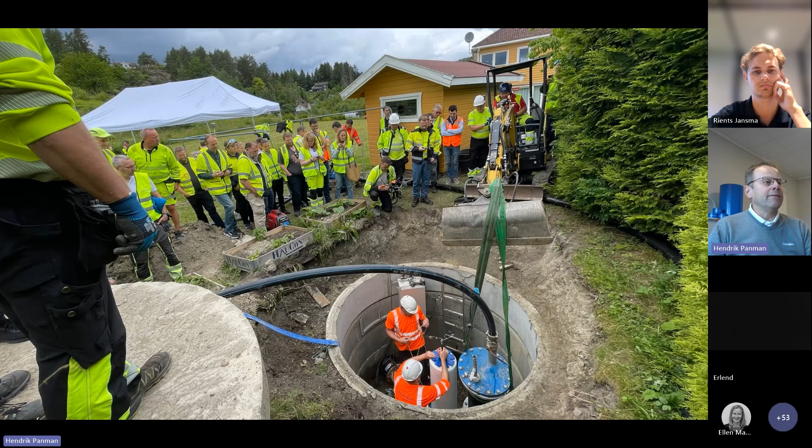Vi tok bussen til lanseringspunktet for selve lanseringen av piggen. Så kom vi frem til lanseringskummen og fikk se hvordan piggen ser ut i virkeligheten. Vi fikk oppleve at den ble ført inn i ledningsnettet. Da var det mulighet å følge piggen langs traseen, og man fikk opplæring i hvordan man gjør trekkingen av selve piggen.

Da vi kom tilbake til skolen, og piggen var på vei til mottakskummen, hadde vi en presentasjon av Rolf fra Brabant Water. Det er egentlig et stort vannverk i Nederland som har brukt Acquarius-instrumentet på 16 inspeksjoner over en lengde på 35 kilometer, så han delte sine erfaringer.

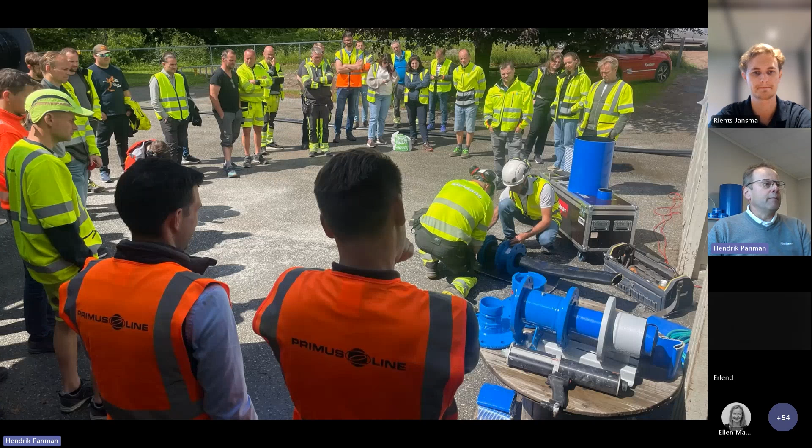Da han var ferdig med presentasjonen, var vi på stedet når piggen kom ut igjen og til overflaten. Så hadde vi en liten demo ute på forskjellige fornyelsesmetoder. Vi hadde en kombikryss fra AVK som var tilrettelagt for å ta piggen inn og ut av ledningsnettet, og en demo i forbindelse med koblinger til en primusline. Så var det litt moro med testing på slitestyrken på primusline overledd.

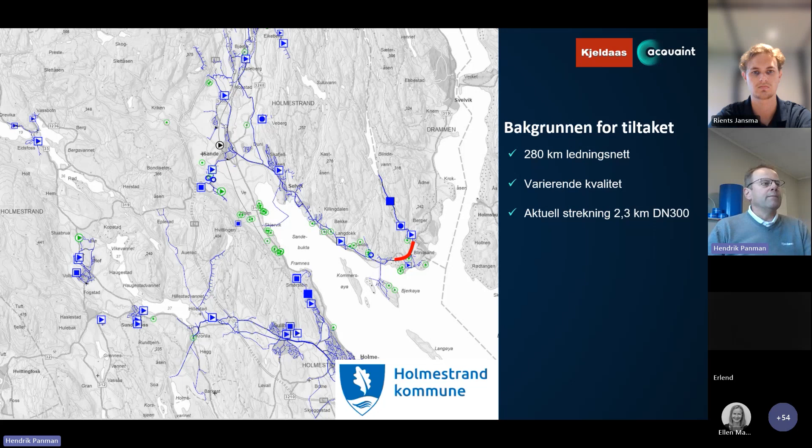Holmestrand kommune har ca. 280 kilometer med ledningsnett, med noe varierende kvalitet. De har opplevd at når de utbedrer en vannlekkasje og graver seg ned, viser det seg at røret med lekkasjen er i veldig dårlig forfatning, mens røret rett ved siden av er i veldig god forfatning. Det er egentlig hovedgrunnen til at man syntes det var interessant å kartlegge de 2,3 kilometerne med DN300-ledningen som er vist på den røde streken på kartet her.

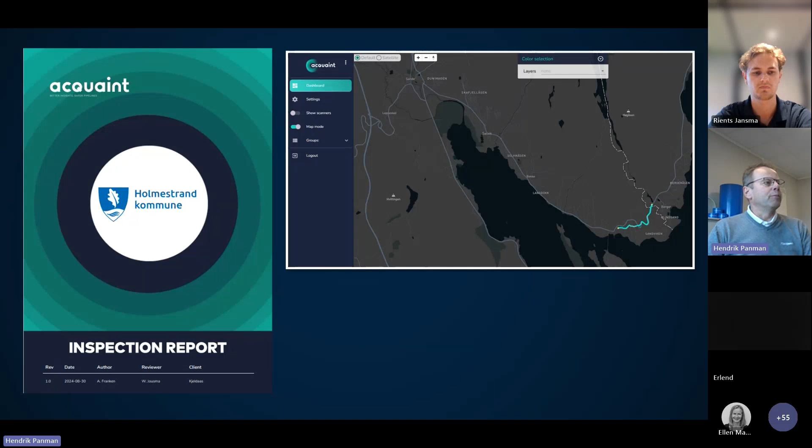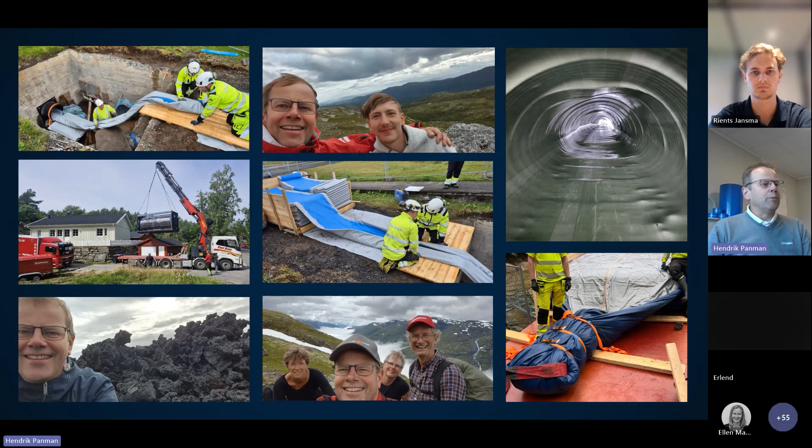Etter at vi tok ut piggen 12. juni i år, og frem til rapporten som foreligger nå, har det skjedd ganske mye som jeg har lyst til å fortelle litt om. Vi har hatt en sommerferie. Vi har installert noen strømper, både i innland og utland. Jeg har vært på Island og gjort noen spenstige installasjoner på Sandnes.

På den aktuelle temadagen viste jeg frem et ultralydbilde av barnebarnet mitt, eller vårt, som i mellomtiden har blitt født. Dette er kanskje litt koblet til hva vi skal snakke om i dag, at man ønsker å vite hvordan det usynlige ser ut, og om det stemmer overens med virkeligheten. Her må jeg si at ultralyden av den vesle gutten stemmer ganske bra overens med virkeligheten. Det er samme type ultralyd som vi nå bruker til å skanne vannledninger eller trykkledninger.

Alle instrumentene er montert på en pigg, og ultrasound-instrumentet er plassert på baksiden av piggen, på det grønne området her. Ultrasound er egentlig ultralyd, en lydbølge som på en måte reflekterer til rørveggen, og så slår den gjennom materialet, og får en refleksjon også på baksiden av rørveggen. Dette blir analysert for hvordan det fungerer - det kan ikke jeg forklare i detalj, men det er lydbølgene som på en måte gir kartleggingen.

Så har vi et instrument som heter Inertial Measuring Unit, IMU. Det er egentlig en enhet som til enhver tid vet hvor piggen befinner seg, hva som er opp, hva som er ned, hva som er høyre og hva som er venstre, som sørger for at man vet eksakt posisjon hvor piggen befinner seg.

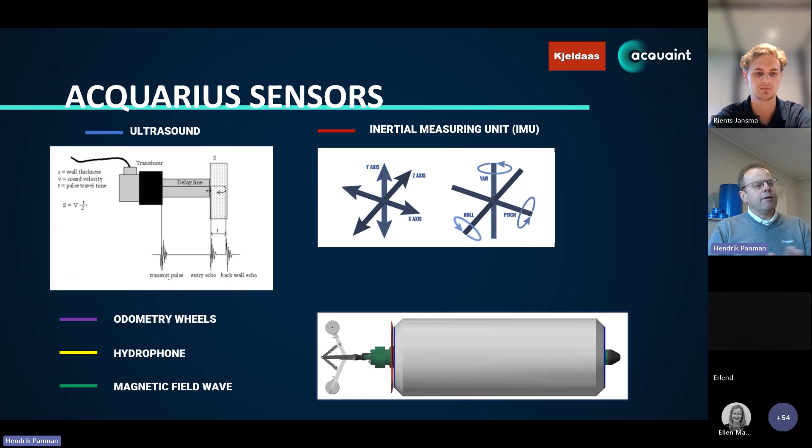I tillegg har man på baksiden det som kalles odometry wheels, hjulene på baksiden, som rapporterer avstanden. Kombinasjonen av IMU og hjulene, pluss innmålingene som ble tatt med GPS, gir en eksakt lokasjon og et eksakt klokkeslett for hvor en eventuell skade har oppstått i ledningsstrekningen. Hydrofonen er egentlig en lydlogger som sitter foran på piggen og registrerer lekkasjer.

Og så er det en magnettråd inni piggen, som blir brukt når man skal skanne betongledninger. Den hadde vi ikke med denne gangen, siden dette var en støpejernsledning. Men når man er ute etter å oppdage brudd i armering i betongledninger, brukes en pigg som har en jerntråd integrert inni piggen.

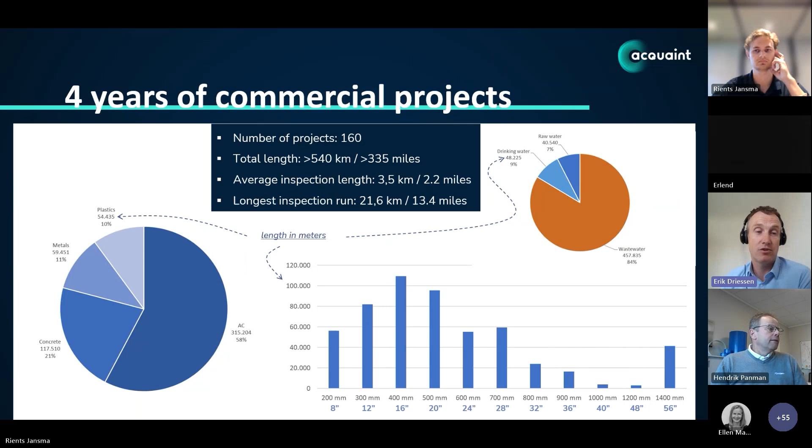We also have a sales team, and Rients is part of that sales team. Rients started with our company a few months ago, and he'll present the first results with you. Later on, I'll come back and present an online dashboard with you.

This is the last slide for me. Looking back at the project Hendrik introduced, it was a ductile iron cement-lined pipeline, or at least, little spoiler, that's what we expected—DN 300 and a little more than 2 kilometers. Rients will go through the results.

Over to you, Rients. Yes, thank you. Can you hear me clearly? Yes. Okay, very well.

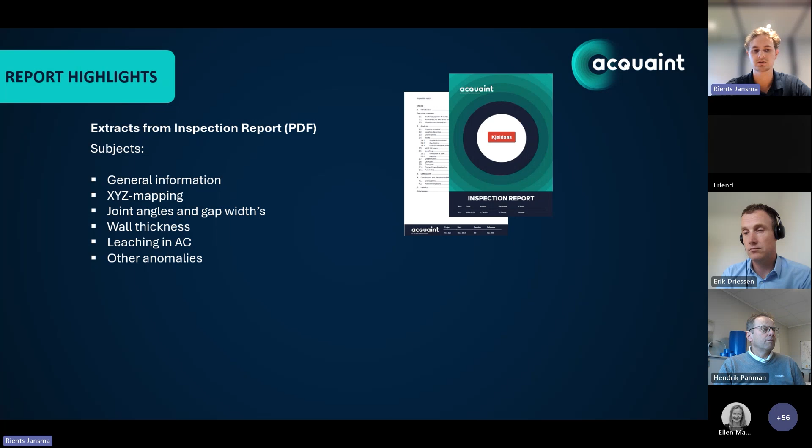I'm going to tell you about the highlights of the report we've sent to the Holmestrand kommune, covering some general information, the XYZ mapping, joint angles and gap widths, the wall thickness, the leaching in the asbestos cement, and other anomalies. After that, Erik will show a live demonstration of the online dashboard.

Starting with some general information. On the right side, you can see the map we've sent—it's a screenshot from the report. At the top is the launching site, a small section of 20 meters of DN 250. Over to the downside at the receiving point, it's DN 300 for the remaining tracé.

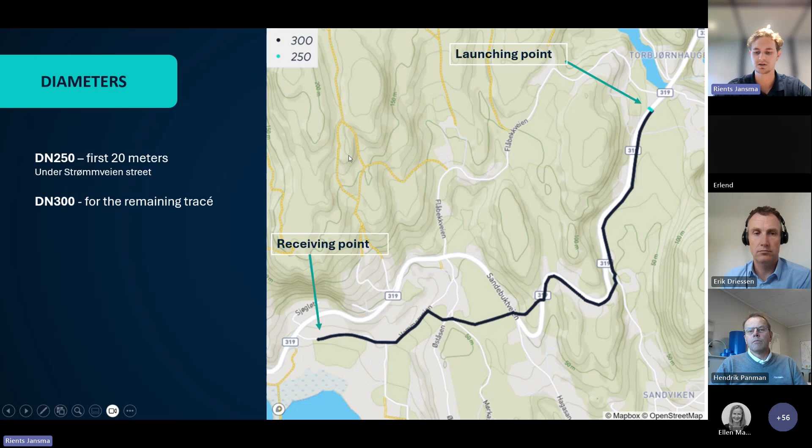So the first 20 meters is ductile iron without a cement liner. Then, as Erik spoiled a little bit, the following 700 meters is asbestos cement. Furthermore, there was cement-lined ductile iron up to the receiving point, and some cast iron spots, mainly in the bends. The presence of the asbestos cement was unknown beforehand, which is a big result to get to know.

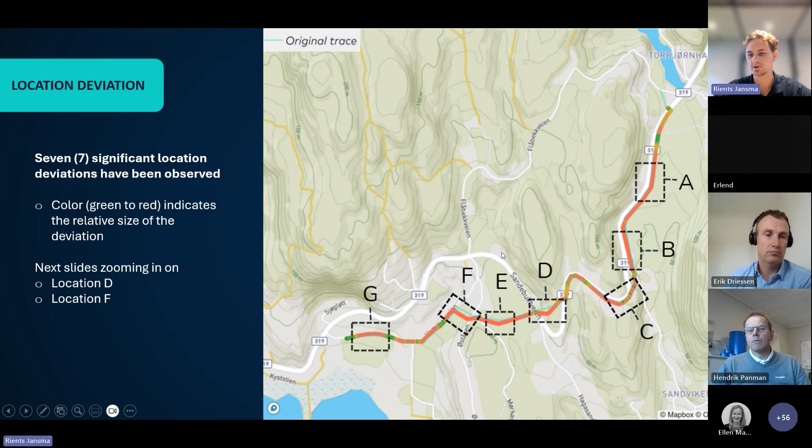Following the XYZ mapping, there were some major location deviations—7 spots we've highlighted in this map. On the right side, you see the map with the line. The green spots are where the line is exactly the same as where the GIS file said it was, and the red spots are 2 meters away from the GIS file or more. In the next slides, I'm going to zoom in on point D and point F.

Location F, same accounts for here for the lines, and the biggest deviation is 22.3 meters. This is also the biggest deviation in the whole tracé.

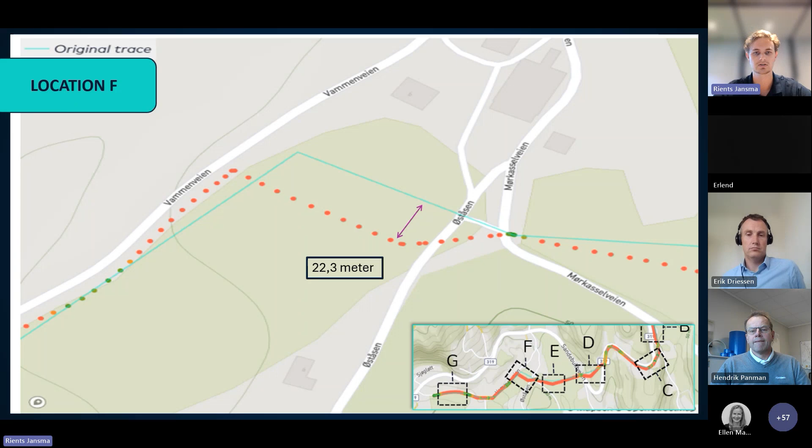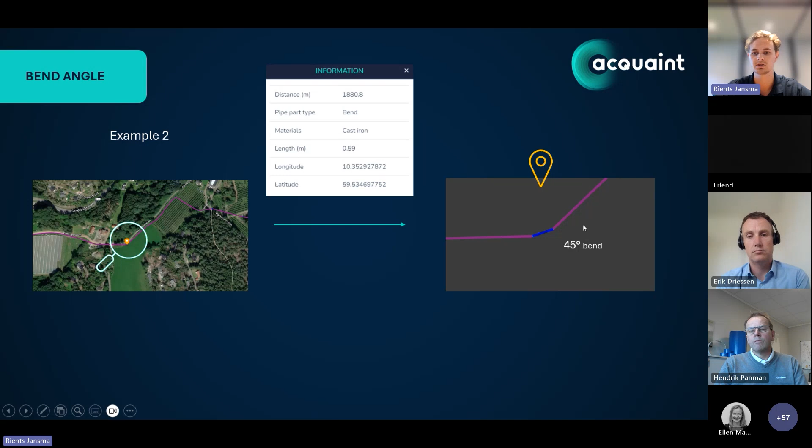So here for example 2, same screenshot on the left side, and on the right side you can see it's a 45-degree bend.

Okay, over to the joint angles and gap widths. Like Hendrik also explained a little bit, here's a picture, and here you can see a gap width of X millimeters. On the right side, you can see the vertical angular displacement of 5 degrees, so from the point you have horizontally, and then it goes down a little bit.

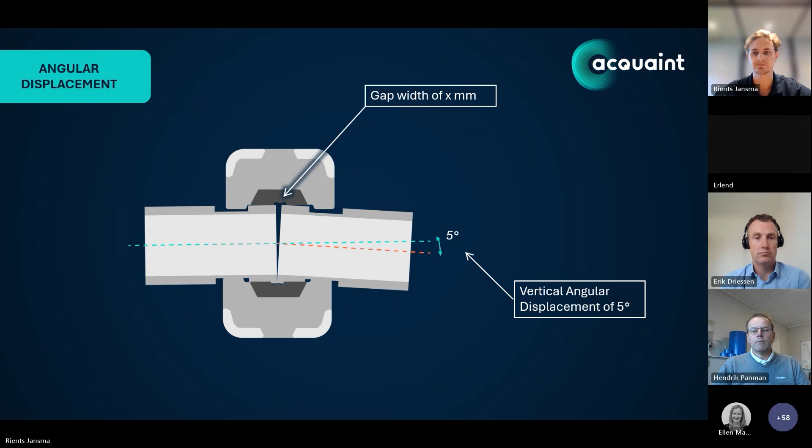In total, we've found 4 critical joint angles, 2 vertical ones and 2 horizontal ones. You can see them here. The numbers at the spots are the ID numbers of the pipe sections we've also implemented in the dashboard.

So we build in a threshold, or a grenseverdi in Norwegian, to account these as critical.

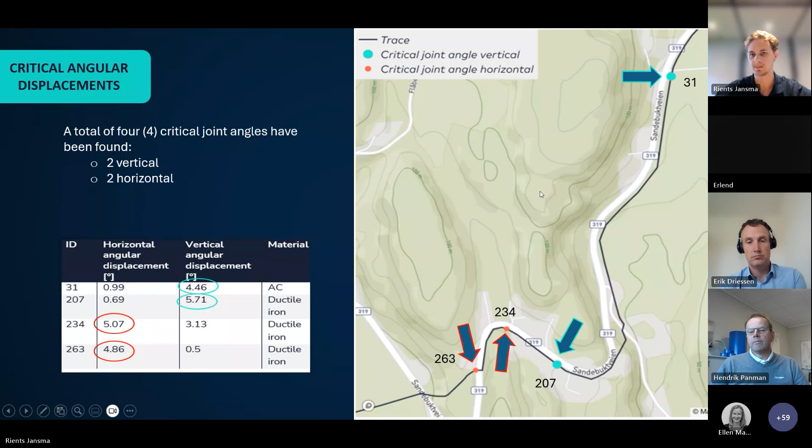So here you can see it's the same map with the numbers, and here you can see the vertical angular displacement. It's critical at 4.46 for AC, 5.71 degrees at ductile iron, 5.07 and 4.86 at the other spots, as you can see here on the left side.

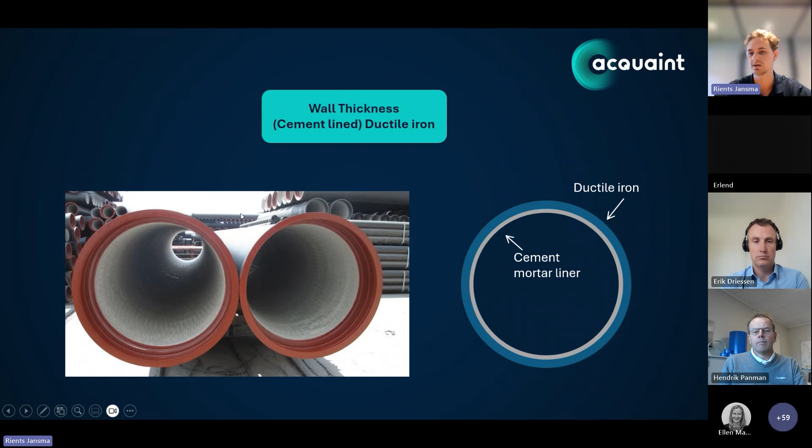The wall thickness, starting with the wall thickness of the cement-lined ductile iron. On the left, you see a picture of a cement-lined ductile iron pipeline, and on the right, a schematic picture. The wall thickness of the ductile iron is stable at around 6 to 8 millimeters.

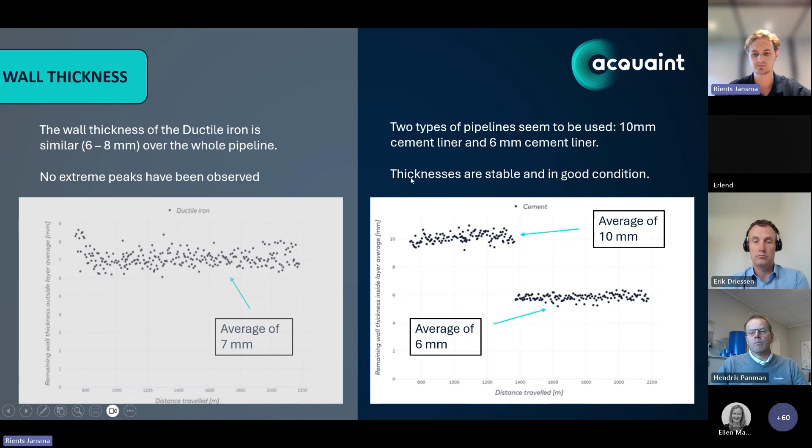There are some leaching spots. It's important to mention that leaching does not remove the wall thickness, it just makes the wall weaker.

This means that it loses its strength. So it's still there, but it's not as strong. It cannot handle any forces.

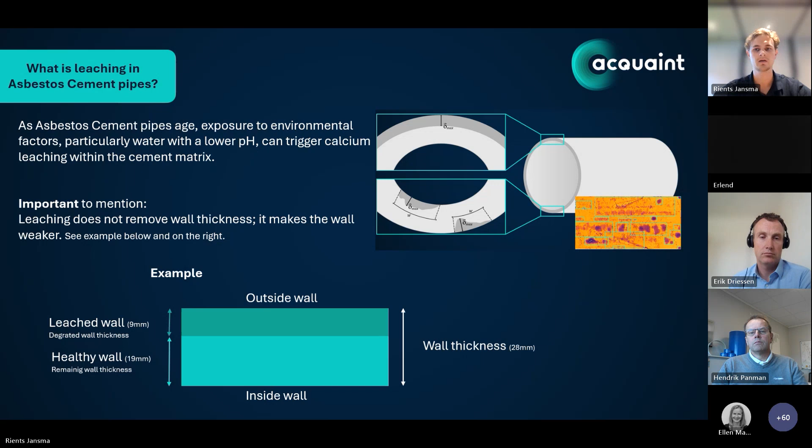So for the leaching in this tracé, this is only the picture of the asbestos cement part. To calculate leaching, knowing the outer circumference, or omkrets, is necessary. Kjeldaas did an omkrets measurement, they measured it on the picture on the left side.

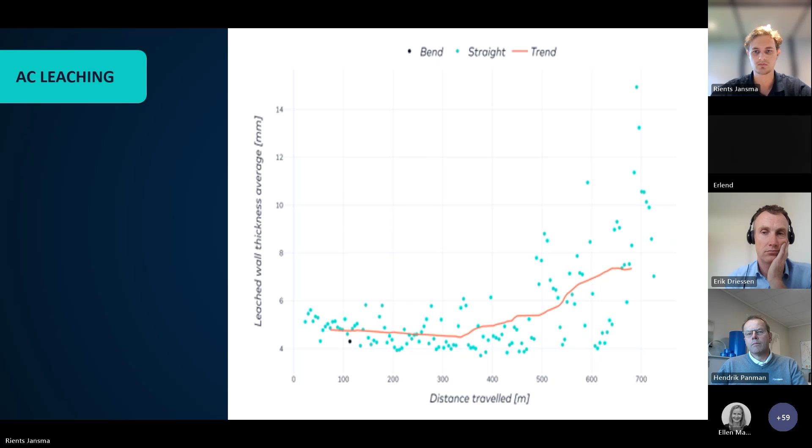In this case, the omkrets is 28.3 millimeters. So for the leaching, on the right side, you see the graph with the leached wall thickness on average, and at the bottom, it's the distance traveled in meters. So the original wall thickness is 28.3 millimeters, and the highest level of leaching was measured in the last 200 meters of the asbestos cement section.

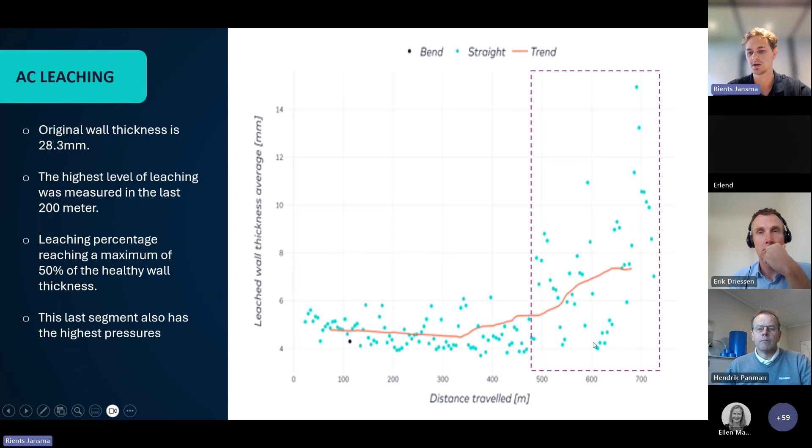The leaching percentage reached a maximum of 50%. At the top, you can see it's more than 14 millimeters leached, which is 50% of the original wall thickness. What's interesting is that the last 200 meters, the last segment, also has the highest pressures within the tracé.

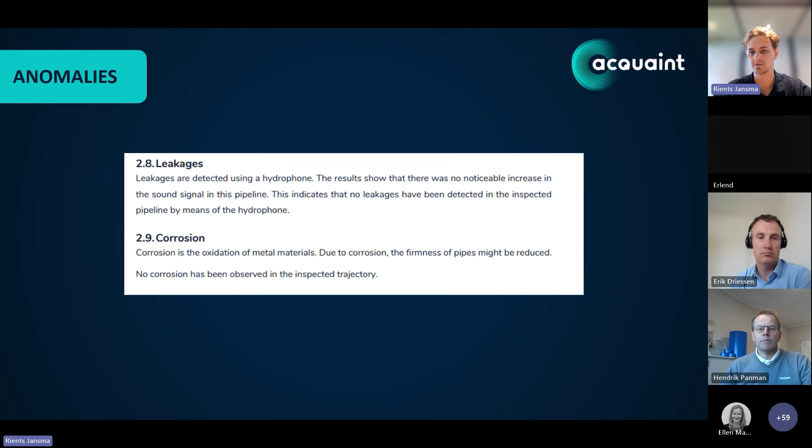So some other anomalies we found, or actually we haven't found, which are leakages. We haven't found any leakages using our hydrophone. And for corrosion, it's the same - we haven't found any corrosion in the whole tracé.

A small summary of what I've just told you. Unexpected section of 705 meters of asbestos cement. The pipeline location, the XY mapping, deviates significantly from expected location, up to 22.3 meters exactly. 4 critical joint angles have been found. 2 types of cement liner were observed from the ductile iron pipelines. The ductile iron and the cement liner are in good condition, and the asbestos cement pipeline shows leaching ranging from 20 up to 50%.

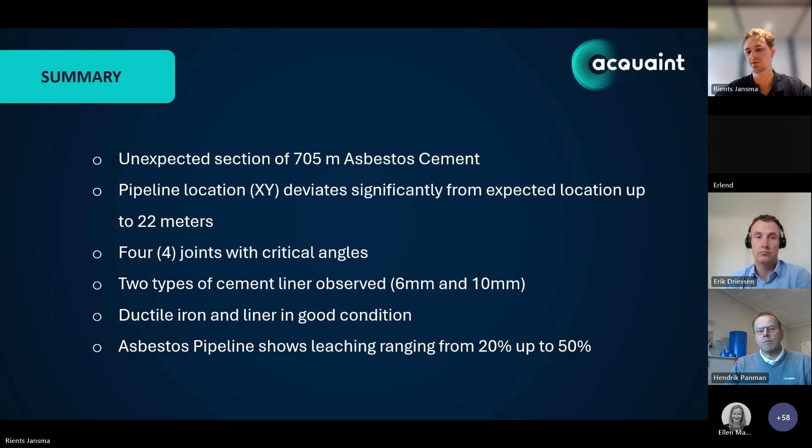So now I'm going to give it over to Erik, who will show the same results in the dashboard.

All right, thanks Rients. I will share my screen. Can you see my screen at this point? Yeah, I see it, Hendrik. So that's good. Yeah, good.

Okay, so thanks Rients for presenting the results. What we have experienced over the past few years is that graphs and tables are really valuable, but it's always hard to put it into context. When you see the dots going up in a graph, you don't know where exactly it is over the pipeline. So that's why we have developed this online dashboard for our clients to get a better understanding of where we found what anomalies and how you can see that in context, like in the surroundings.

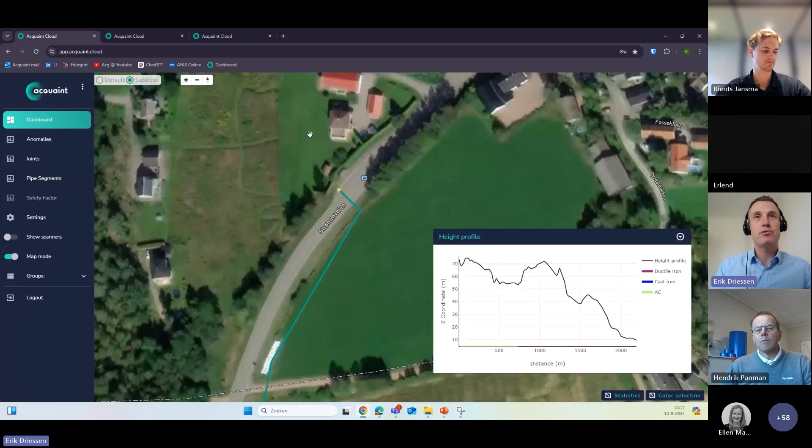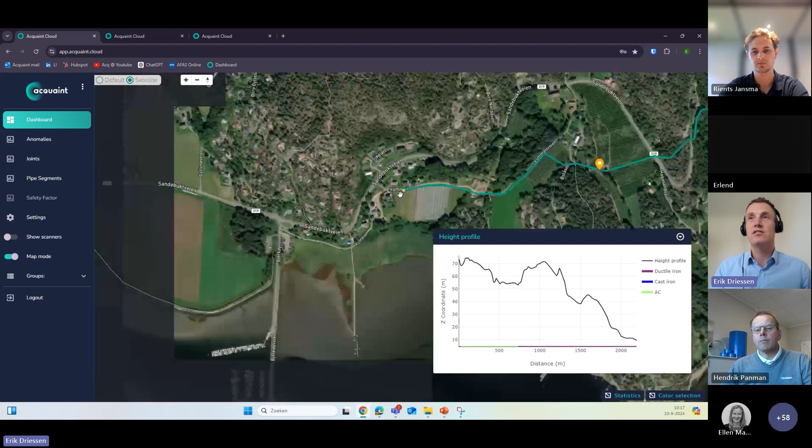Just for the people that are here that also attended the inspection, it's always nice to recognize things a little bit. So this is the point where the bus was parked and where we launched the pig into the pipeline. Then we crossed the street and the pig took off. Then we went down, down, down. And this is the little school where we all gathered, and this is the pit where we took out the pig again. So just for you to have a feeling of how the trajectory of the pipeline was.

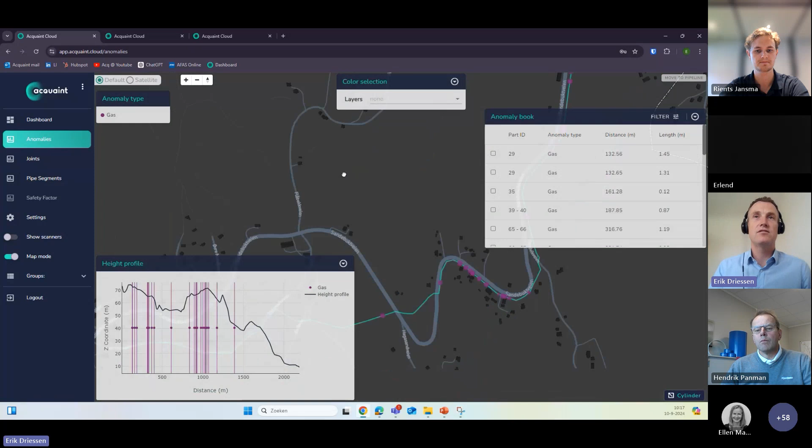So I'm now going to look at the anomalies. I will set the default mode. In this anomaly view, normally we report the most important anomalies, like pieces of cement that are missing off the liner, if there is dirt observed somewhere in the pipeline. And actually the only anomaly that we have detected here were some gas pockets,

which needs some explanation, because while pigging the pipeline, there's also a risk of introducing gas into the pipeline, which we suspect has happened here. So at the bottom, you see the profile of the pipeline again over the 2 and a little bit kilometers. And what you can see is that the instances where we have spotted gas typically are also at the higher points. So what we suspect happened is that, because all the air vents were replaced or checked prior to the project, during introducing the pig, we took some air with us, and we didn't give the system time to de-aerate those gas bubbles at the air vents.

So this is not really a super valuable piece of information. Still, I wanted to show you this, because in sewer pipelines, for example, accumulation of gas can cause all kinds of problems like H2S attack. But for this project, it was a little bit less relevant. Still, I wanted to show you this for your information.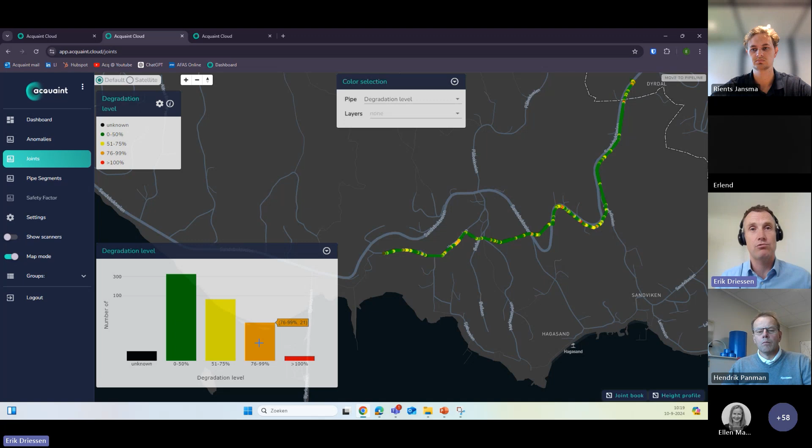So if it's all higher than 0, then we give it a higher degradation level. These thresholds or these values can be set by the user. So when you look at the map here, you see a few instances where the joints got a red dot.

So when I click on this joint, for example, you see that there's a vertical angle of 5.7 degrees, a small horizontal angle, but also a gap width. So it's clear that this joint doesn't sit nicely in the joint. So the pipe segments are a little bit shifted away and they're sitting under an angle in this joint.

So what often also helps is when you enable the satellite view here, you see where this joint sits, and sometimes you see a dirt road going over it with heavy traffic, for example, which is not the case in this situation. And when I go a little bit further, you see another red joint here, which has a horizontal angular displacement, but also a vertical and also a gap width, maximum 18 millimeters. So these are also the joints that Rients just showed in the PDF report, because we would like to help the client to look at the most concerning items that we have spotted.

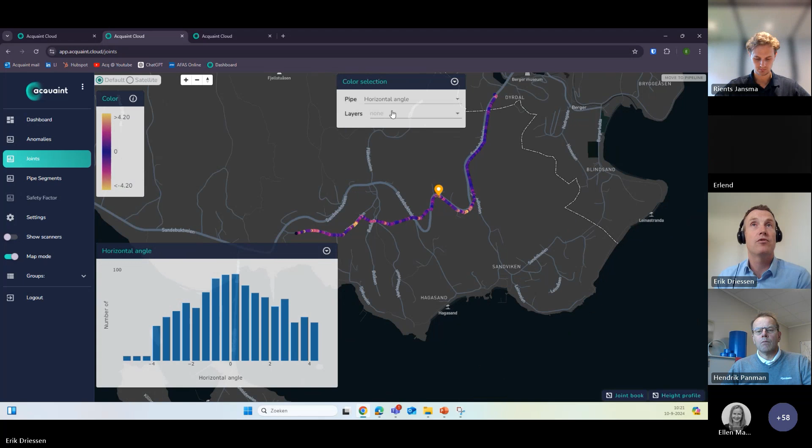So this is a value taken together, but you can also extract individual measurements. So if you're interested only, for example, in the horizontal angular displacement, the color code changes from -4 to +4 degrees. And you can see that the spread of the horizontal angular displacement is colored differently here.

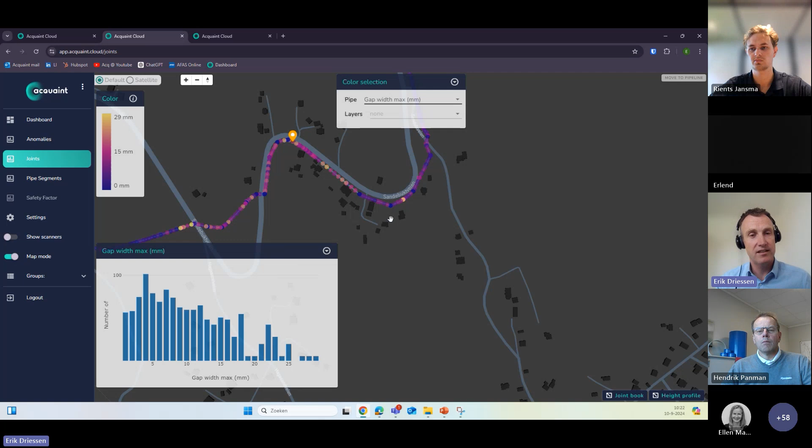You see more horizontal angular displacement in this curve, for example. The same you can do with, for example, the maximum gap width. But as you can see, there's a lot of information to take in, so that's why we also came up with the degradation level that takes everything into account and gives it a color code for you to know where to zoom in first.

So this is looking at the joints. So when we go to the next view mode, that's the pipe segments. And basically the pipe segments view will tell you what the quality and the dimensions are of the individual pipe segments, and mostly the wall of those pipes.

So again, you see the same view over here, and I've selected the view material. As you can see, there have been 3 materials observed: ductile iron, cast iron, and asbestos cement. This is the spread in terms of length, in terms of number of segments, excuse me. And here you can recognize the asbestos cement part at the start, and then it goes over into ductile iron.

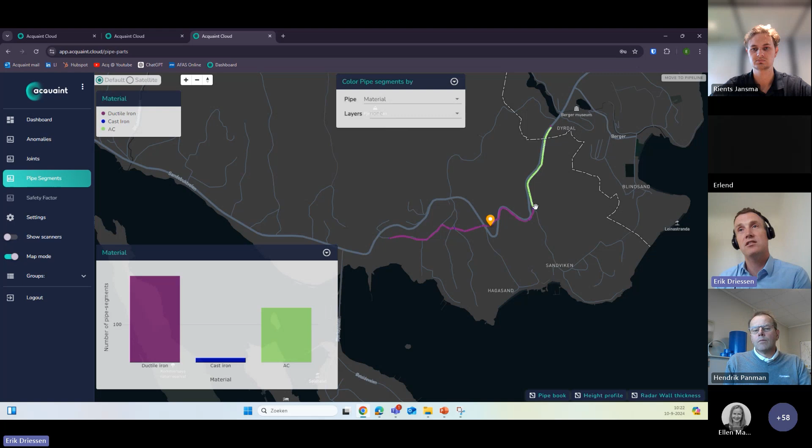And like Rients explained, mostly the bent pieces, like here, small blue part there, those are cast iron bent pieces, which are applied almost with every bend. There's one. So that's the material.

Also here, by the way, you can select the height profile, and when you zoom out or zoom in, the height profile is adapting to the piece of the pipe that is in view.

As a next selection mode, I will go to the minimum remaining wall thickness. Let me explain this a little bit. There is a mean, a minimum, and a maximum wall thickness.

We make thousands of measurements per pipe segment. A pipe segment is a length of 4 or 5 meters, and per pipe segment we make thousands of measurements at different clock positions. To make this digestible for the user, per pipe segment we gave it a color code: what is the minimum wall thickness we spotted, what is the maximum, and what is the average wall thickness. So that applies per pipe segment.

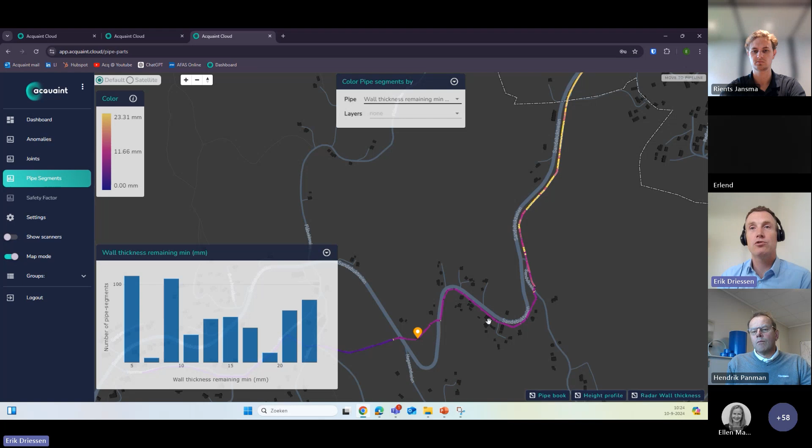As a pipeline owner, you're typically interested in the extreme, so that's why we select the minimum wall thickness - per pipe segment, what is the thinnest part of the pipe we have observed. Because we have asbestos cement and ductile iron in the same view, you get quite a big spread, and that's hard to compare. So I open the pipe book here, select the filter, and focus on the asbestos cement first.

This is the asbestos cement pipeline. We have selected the minimum wall thickness, and this is a scale from 9 up to 23 millimeters. Maybe you remember that the original wall thickness was 28 millimeters.

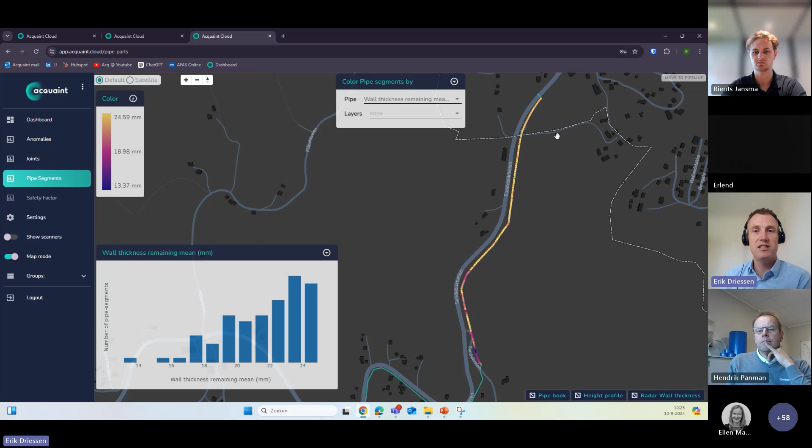So this is also the conclusion: the thinnest little spot of remaining healthy wall thickness of the AC is just 9 millimeters. Let's zoom into the last part of the pipeline with the smallest or the least part of healthy wall thickness. When we take, for example, one of the more blue ones, you see...

You can click on that pipe segment and then open the radar with the wall thickness. Here you see at the different clock positions in the pipeline the wall thickness - this is the y-axis, and the x-axis is basically the circumference of the pipeline. At the 9 o'clock position, for example, there's still 11 millimeters left of healthy wall thickness. When I select this pipe segment, you get another view.

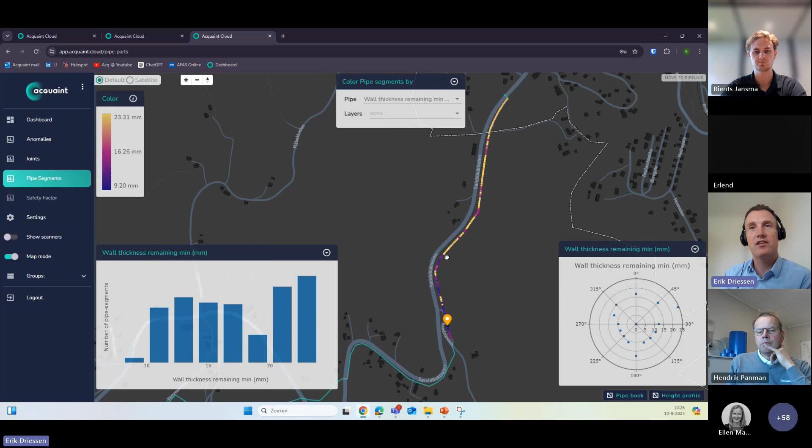So this pipeline, the minimum wall thickness on basically all the clock positions is heavily degraded. You can do that for all the pipe segments you're seeing here, but also this view tells you up till here the minimum wall thickness is fairly stable, but here suddenly something is changing.

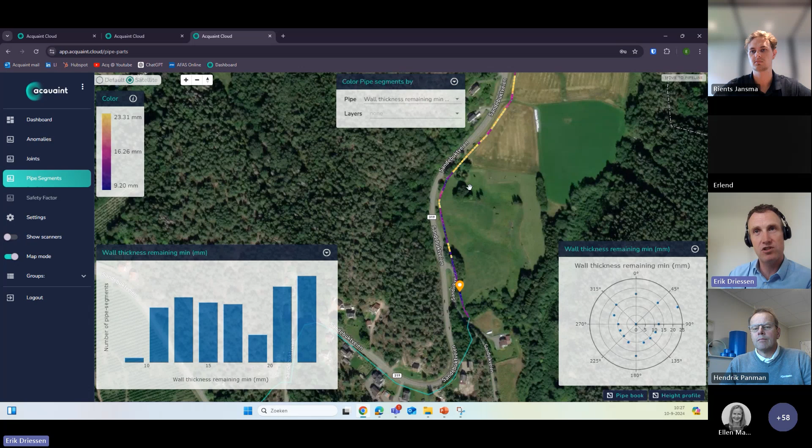Sometimes it can help to enable the satellite view to see what might be a cause coming from ground level. What we often see in the Netherlands, for example, is agricultural activities like fertilizers that could cause damage to the AC pipeline, and we also saw that the leaching of the pipeline is coming from the outside. Another cause could be soil type - clay versus sand versus rocky soils - or groundwater tables.

Another explanation could be that this was installed at a different time - this is an older piece of AC pipeline, and this is a newer part. Sometimes you can answer those questions together with the client, and sometimes it's just guessing. So that was the asbestos cement section.

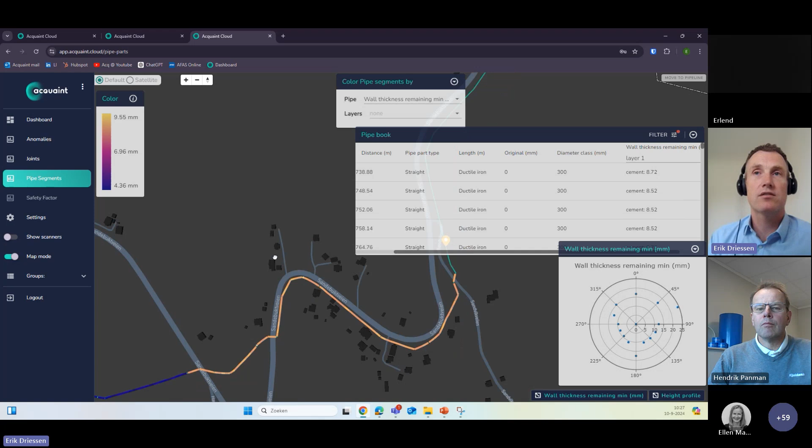Let me open the pipe book again and go to the ductile iron. And let me minimize this one. So we're still looking at the minimum wall thickness. This is the ductile iron pipeline.

You see clearly two colors because in the pipe book I selected the first layer, and the first layer is cement. The second layer is the ductile iron, and the third layer is a combination of both. So let me start with the first layer, that's a cement liner.

Like Rients explained just now in the graph, we saw a big jump in wall thickness of the cement liner, which is clearly visible in this picture. You see here, the yellowish color is around 10 millimeters minimum wall thickness of the cement liner, and then it jumps down to around 5 millimeters.

But also when I select, for example, the mean, it's all very stable - a very stable wall thickness of the cement liner. And you can also select the standard deviation, and that's also relatively stable.

So again, as Rients presented, the cement liner - it's an interesting observation that there seems to be a different type of pipeline, one with a thicker cement liner and one with a thinner one, but the cement liner itself was in perfect condition.

So let me open the pipe book again and go to the second layer, which is the ductile iron itself, basically the most important part of the pipeline. What you see here from start to end is the wall thickness ranges from 5 up to 7.3, which is the color code.

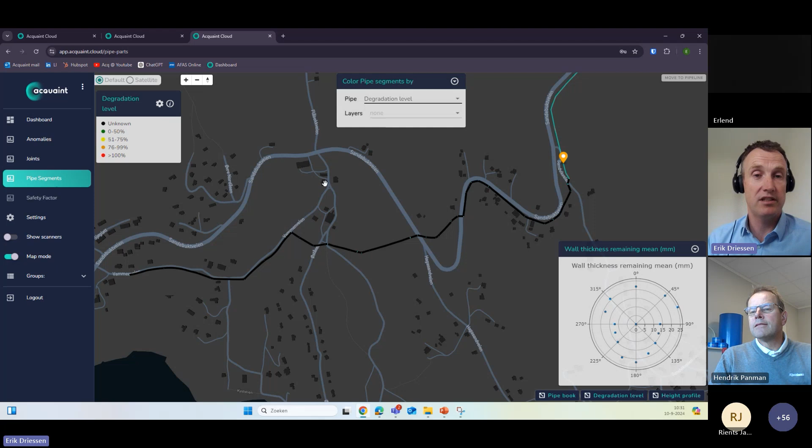With this, I'm coming to an end, and I think we are perfectly on time because we still have half an hour for discussion or questions. With that, I'll hand it back to you, Hendrik. Maybe you still have questions. Did I miss anything on the dashboard? Do you think I should show anything more?

No, I think it was very good. I just have some small moments where we can use this information, and then we can do the questions at the end. Sure. Oh yeah, you still had a piece of your presentation, of course.